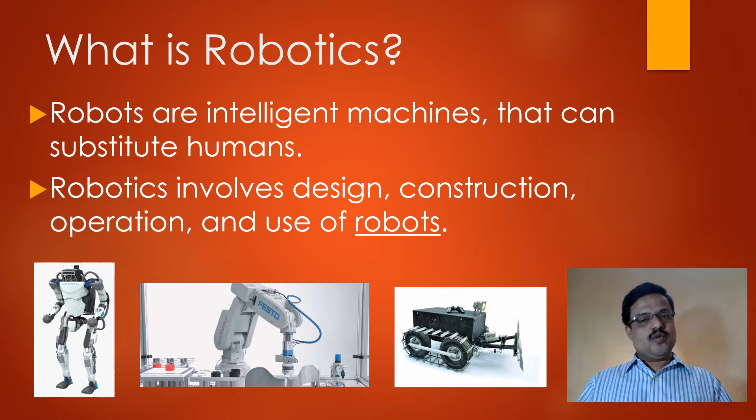Robotics has thousands and thousands of applications. Let's take a look at some of these applications.

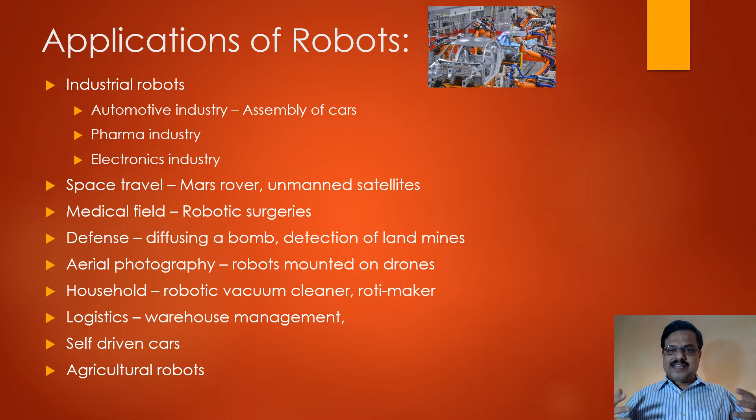These systems are very flexible. That means tomorrow, if you need a different model to be made, a small change in the programming and you can make a different model as well. So it's very commonly used in the automobile sector, in the electronics industry, in the pharma industry also, for mixing different reagents in the right proportion, for packaging the bottles and so on.

In the space travel sector, again robotics finds a lot of applications. This image is actually the Mars rover. It's a vehicle, an unmanned vehicle which can move on the surface of Mars. Now you can imagine the surface of Mars is not going to be totally plain, it's got to have a lot of ups and downs.

So there are 6 wheels that are given which can then balance the vehicle even if the surface is not perfectly smooth. It has a robotic arm which can collect soil samples or do other research kind of work. It has a camera which can capture images and send these images to Earth. It can communicate with Earth through telecommunication. So space travel also has a lot of applications for robotics.

In the medical field, you have a lot of testing being done through robotics. Even minor operations can be done by robots.

In defense, there are a lot of applications. Imagine there's a ticking time bomb which has to be diffused - very dangerous for a human being to go and do this work. So a robot would actually go and diffuse this time bomb, or it might pick up the bomb with its arm and dispose it off to a far off place.

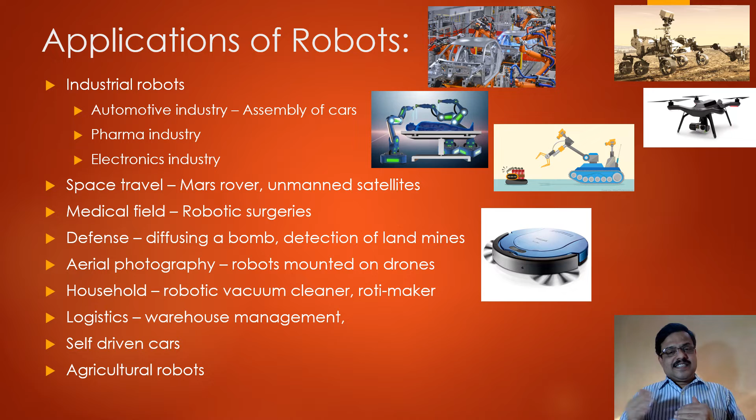Household uses - this image is actually a vacuum cleaner, and it can be programmed in such a way that once you leave it in a particular room, it can sense the size of the room, it can sense where the furniture is, and it will move along the floor and clean the floor. It's a programmable vacuum cleaner, and hence it's also part of robotics.

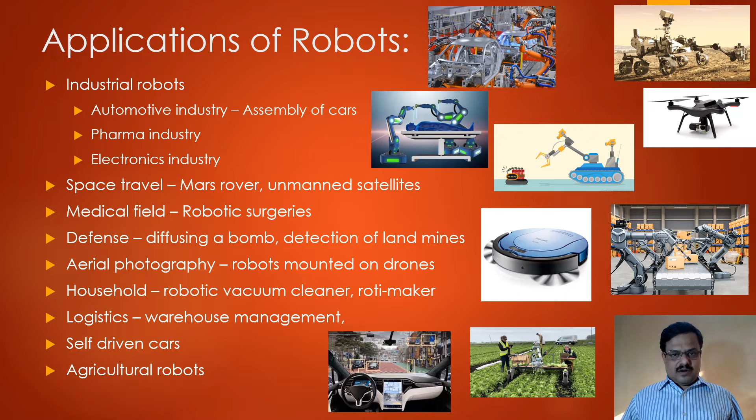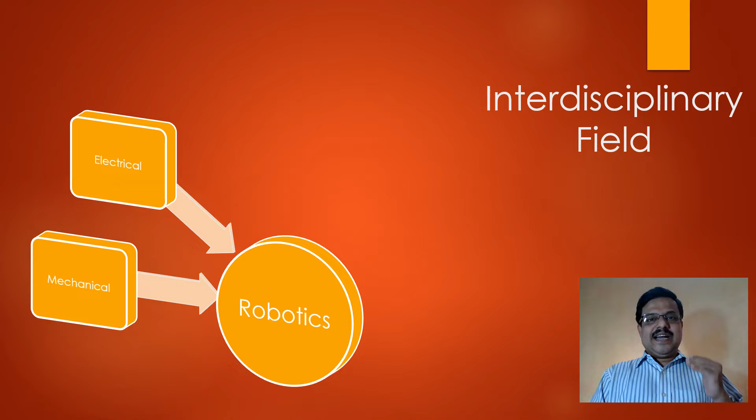Robotics is called an interdisciplinary field. The reason is it requires professionals from various different fields. You need experts from varying different fields - people with a mechanical engineering background, electrical engineers, electronics engineers, computer engineers, telecommunication experts, as well as bioengineering professionals. Why is it that all these fields have an application in robotics? Let's understand with the help of some examples.

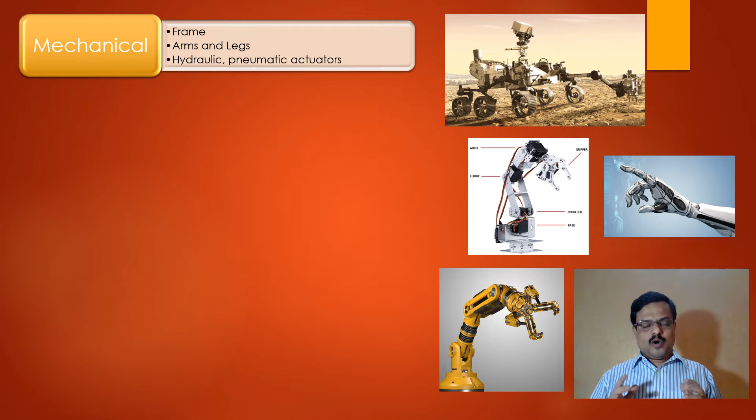Mechanical engineers would be required for designing and manufacturing the frame of this robotic system, the arms, the legs. The actuators are generally going to be hydraulic or pneumatic actuators. So all these would require a mechanical expert for designing and manufacturing this.

You would need electrical engineers because every robotic system is going to have some power supply, which could be through battery or through the main supply. Sometimes it could be solar powered. For example, we saw the example of the Mars rover, where it could very easily be solar powered so that it can store energy from the sun. So electric motors, there's a lot of electrical circuitry involved, which requires electrical experts.

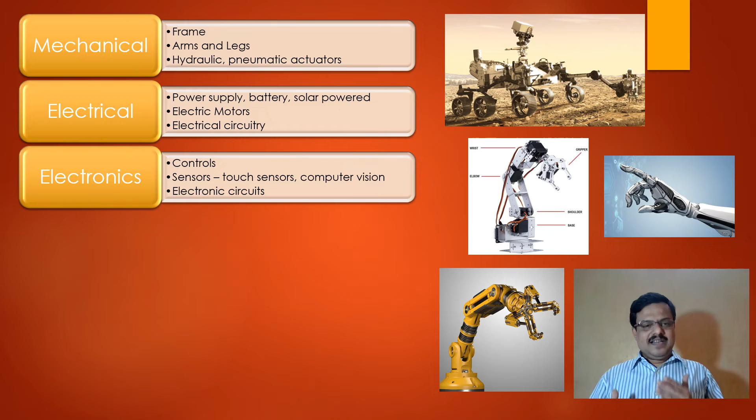Electronics is also required. There are so many controlling circuits, like for example, so many sensors that are necessary in robotic systems. It could be touch sensors. Now these touch sensors are basically going to have very low voltage electrical impulses, and then these would have to be amplified, digitized, and then fed to the brain of this robotic system, which is basically some processor. So this activity would have to be done by an electronics team. Electronics engineering is also part of robotics.

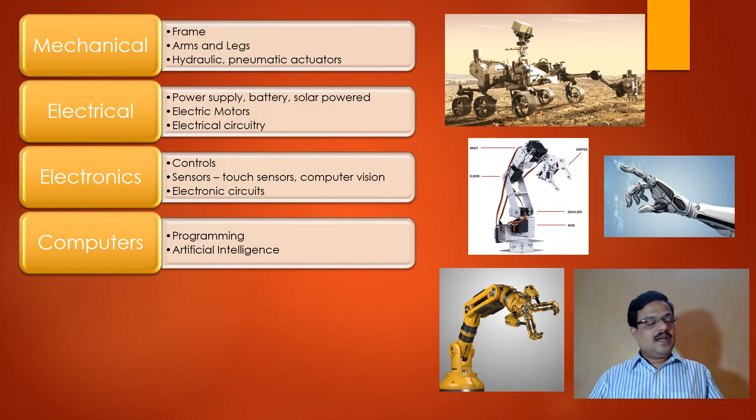Computers, absolutely - the brain of this robot is going to be a processor. Computers and programming is an integral part of robotics. You need to program that system to function in whichever way you want it to, so programming knowledge is important. Artificial intelligence - a machine, when it's given its own intelligence, we call it an AI system, artificial intelligence system.

Telecom engineers would also be required. A lot of times these robots work in places where it is not possible for humans to go. You have robots working under the ocean or in some hazardous environment, or sometimes in a spacecraft, unmanned spacecraft. In such cases, the communication with the world will happen through telecommunication, so you need telecommunication experts. As we already discussed, these spacecrafts will be taking pictures and sending these pictures to Earth, which requires telecommunication experts.

Also, bioengineering experts might be required. A humanoid is a robot which is almost like a human being. It's got legs and arms. So to design that kind of a system, you need a person who would be a bioengineering expert, because only that person would be able to design all the joints properly - the ankle joints and the wrist joints. Take a look at that picture on your screen where it's a hand - you can see the fingers and everything. Now that designing would not be very simple for a mechanical engineer.

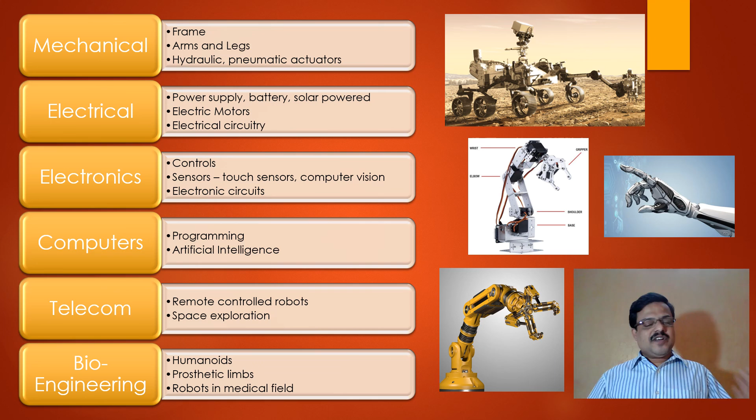In short, robotics is a vast field having a lot of applications. The manpower requirements in this field are increasing. You need experts from a variety of fields, from mechanical to bioengineering to computers and so on. Any budding engineer who wishes to do a career in robotics can take up this career after doing graduation or post graduation in any of these fields, because a company which specializes in robotics would require experts from all these various fields.